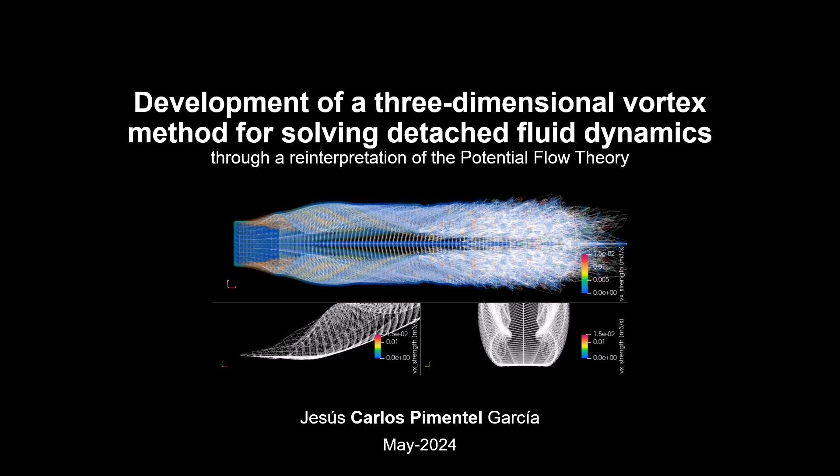Hello, everyone. This is Carlos Pimentel from Mexico, and I'm going to present the research I developed during my PhD in Spain related to computational aerodynamics. The title of this presentation is Development of a Three-Dimensional Vortex Method for Solving Detached Fluid Dynamics. As you can see, this research is based on a reinterpretation of the potential flow theory.

First of all, I would like to briefly introduce myself in order to put my work into perspective. As I said before, I am currently a PhD student in an aeronautical engineering program at the Polytechnic University of Catalonia. I have experience in experimental aerodynamics, having carried out tests on small parachutes and satellite TV dishes at the National Polytechnic Institute in Mexico. I also have experience as a user of CFD software based on the finite volume and lattice Boltzmann methods, mainly to perform aerodynamic simulation on parachutes, UAVs, full-scale aircraft, and rockets.

During my master thesis, we developed a Lagrangian mathematical model for a payload parachute articulated system to perform a dynamic and stability analysis during its descent phase. Furthermore, I have experience in the design, manufacturing, implementation, and testing of a small parachute for various applications, including UAV and sounding rocket recovery.

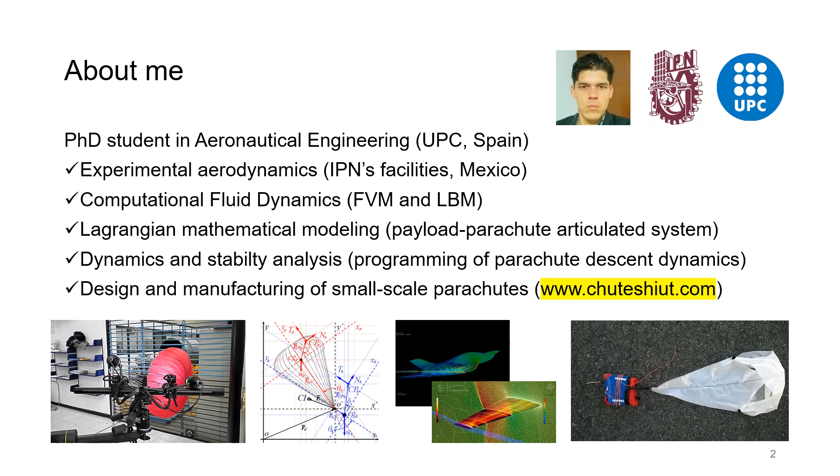It is now time to define the general objective of this research, which is to develop a pure Lagrangian velocity-vorticity-based computational code for the accurate solution of fluid flow past three-dimensional shell bodies, or in simpler terms, plates. Such a method must be developed from a strictly numerical point of view, avoiding the use of any semi-empirical approximations or ad hoc corrections. Furthermore, the input parameters must be reduced to a minimum in order to limit their dependence on the results and to reduce the complexity of the numerical analysis.

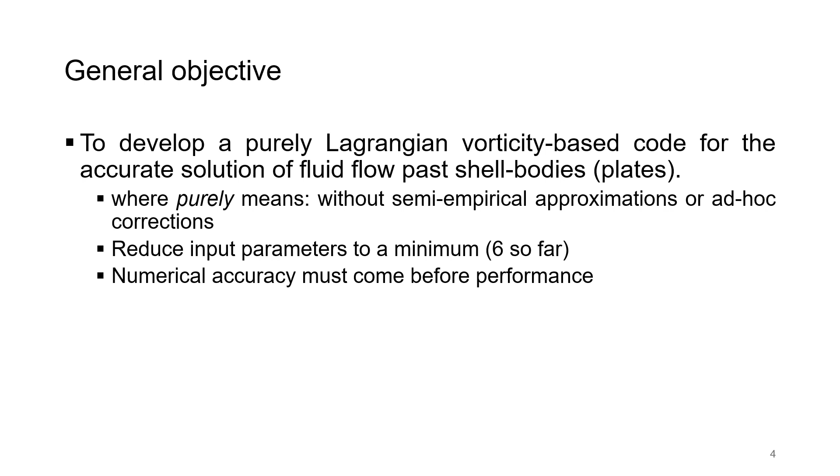At this point, the current version of the final code requires only 6 input parameters. It is important to emphasize that at this stage of development, numerical accuracy must take precedence over computational performance. I will now describe the specific objectives of this research. The first is to develop simpler codes in order to understand and analyze in detail their numerical behavior as a function of input parameters and spatial and temporal discretization.

The first corresponds to the two-dimensional unsteady discrete vortex method, or UDVM, described in the well-known book Low-Speed Aerodynamics, written by Professor Joseph Katz and Alan Plotkin in 2001. While the second corresponds to the two-dimensional full vortex cloud method, or FVCM, described in detail by Professor R.I. Lewis in the book Vortex Element Methods for Fluid Dynamic Analysis of Engineering Systems, published in 1991. The code for the latter is available for downloading on github.com, as well as the following methods described.

The second specific objective is to develop a more complex vortex lattice scheme from a simple one. The simpler scheme is the standard vortex lattice method, which only includes wake detachment along the trailing edge. A more complex model is shown in the corresponding figure, which includes detached lateral wakes and is able to give a good approximation, at least for the lift component, for low aspect ratio configurations in the low angle of attack range.

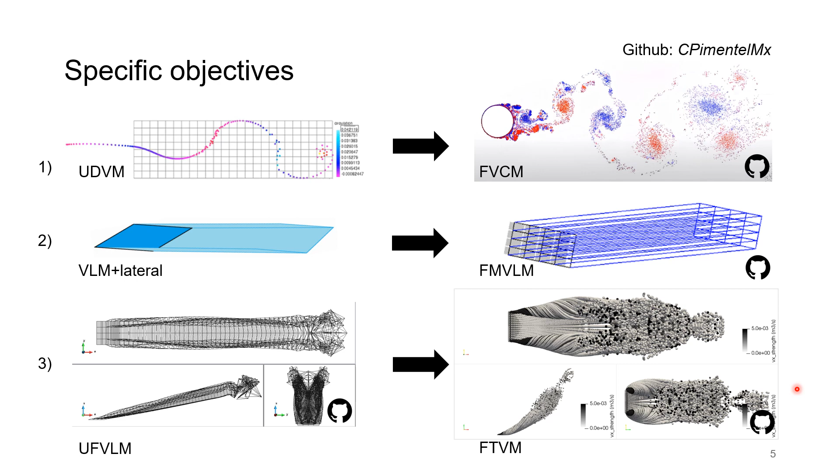Now it is time to briefly introduce the subject of this presentation. Potential flow theory is defined by the Laplace equation, which is a second-order linear partial differential equation containing the Laplacian operator and a scalar potential function. The vectorial velocity field u, which depends on the x, y, and z directions in Cartesian coordinates, can be obtained from the gradient of the potential function phi.

A classical visualization obtained by solving the Laplace equation can be observed in the upper figure, where the flow path is perfectly defined, rounding the airfoil along the calculated streamlines. Mathematically, a potential flow is defined as irrotational or vorticity-free by applying the rotational operator to the velocity and setting it equal to zero.

Moreover, a potential flow can be incompressible or compressible, so it is not limited to having a divergence-free field. But in the context of classical potential flow theory, we consider the first assumption. This is the subject of the present research.

The supposed inviscid assumption of a potential flow is in no way mathematically defined. The absence of fluid viscosity nu in the formal definition does not in itself mean that such a flow is inviscid, and strictly speaking, it is not possible at this point to define anything related to this particular property. Note that the definition of a potential flow defines fields, but not a physical property such as viscosity.

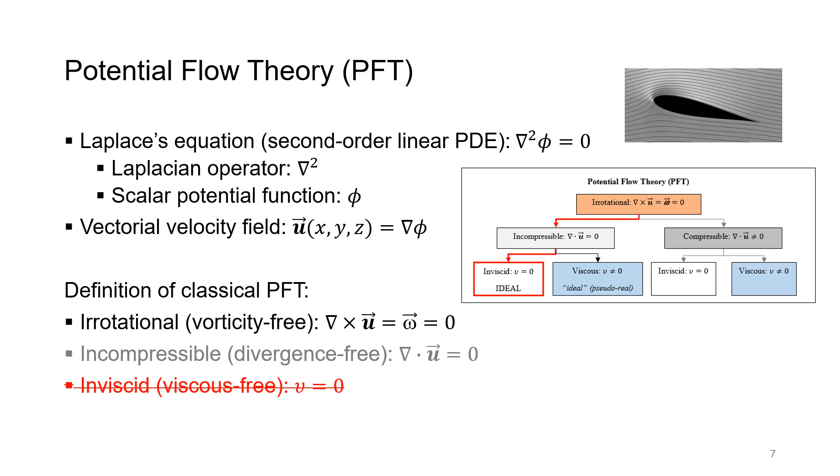To demonstrate that the current interpretation of a potential flow models a viscous fluid, I will refer to the well-known D'Alembert paradox, a classical problem where the drag component is absent for a two-dimensional circular cylinder immersed in an ideal flow, defined as an irrotational, incompressible, and inviscid fluid. The first thing to remember is that the Reynolds number is simply the quotient of the inertial and viscous forces.

The first figure shows a physical test for water, a naturally viscous fluid passing a circular cylinder at extremely low speed, corresponding to an extremely low Reynolds number. As expected, the water shows a laminar flow pattern on the surface of the cylinder. The other figure shows a potential flow simulation, which surprisingly produced the same streamline pattern, although it is known, or perhaps not, that potential flow theory models under an infinite Reynolds number condition, as confirmed by several renowned fluid dynamicists.

Unfortunately, I cannot go into more detail here, as time is limited for this presentation, but I invite you to read a short blog article entitled A 4-Question Quiz on Fundamentals of Fluid Dynamics to analyze this subject more deeply from an observational point of view.

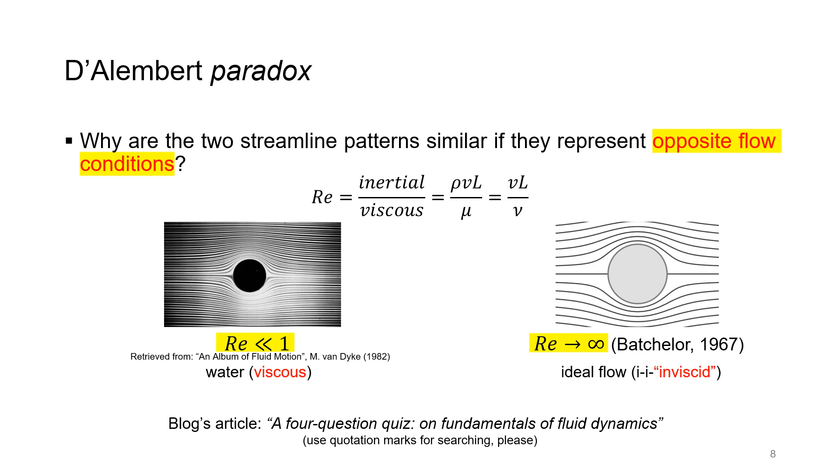Vortex methods are a family of Lagrangian-based numerical methods developed to approximate the Navier-Stokes equations in their velocity-vorticity form. As you can see, the pressure field drops out after applying the rotational to the total time derivative of the velocity field, which is a huge advantage in not having to deal with such a term. Since it does not appear in the definition, the flow solution does not depend on pressure. However, it can be reconstructed a posteriori if necessary.

In such an equation, the first term on the right-hand side corresponds to vortex stretching, while the second corresponds to viscous diffusion. By their nature, vortex methods do not require subdividing the space occupied by the flow, as do meshing methods in a more conventional computational fluid dynamics approach, such as those based on finite volumes. For this reason, it is less computationally expensive because, like all particle-based methods, it only needs to calculate the flow variables at certain and sufficient points of interest, rather than in the entire surrounding space.

But what is the relationship between potential flow and vortex methods? Well, vortex methods need to be fed with a precise amount of vorticity detached from the entire surface of the object in order to solve accurately. This is where the current development is relevant. It provides the correct amount and orientation of vorticity to the surroundings without forcing an attached viscous flow assumption, which should be the base model to solve fluid dynamics from a purely meshless approach.

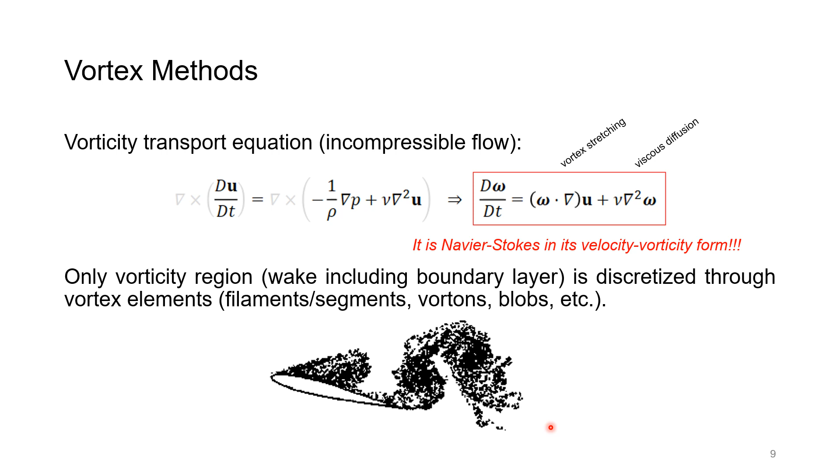The first article has been published in a first quartile journal called Advances in Aerodynamics. The full multi-wake VLM is the result of a numerically well-founded procedure that basically consists of adding groups of wakes to the simplest model, the single trailing edge wake or standard VLM, shown in figure 17 with number 1. Another well-known model is shown with number 2, which allows the separation of the lateral or wingtip wakes and gives good agreement for low aspect ratio configurations, but is limited to the low angle of attack range.

The next step, shown in number 3, is the addition of the leading edge vortex, which is numerically justified by a counterintuitive rotation, since it is analyzed within the pre-stall condition, where the leading edge vortex wake remains attached to the plate, as has been experimentally observed. For the post-stall condition, a logical and intuitive rotation must be expected. However, such a model will solve a cavity case, as concluded in the present research.

Number 4 shows a multi-trailing edge wake submodel, which is very similar to the detached circulation scheme in the LinAir code developed at NASA in the 90s, shown in the figure just below. In number 5, the leading edge vortex wake has been added to improve the previous results.

The next model, shown in number 6, is actually the full multi-wake VLM, in which external and internal vortex wakes have been included in order to capture the three-dimensional effect of the flow, which was limited in the previous models. As you can see, this is the chosen base model for future implementations within the present research. A detailed scheme of such a model is shown in figure 12.

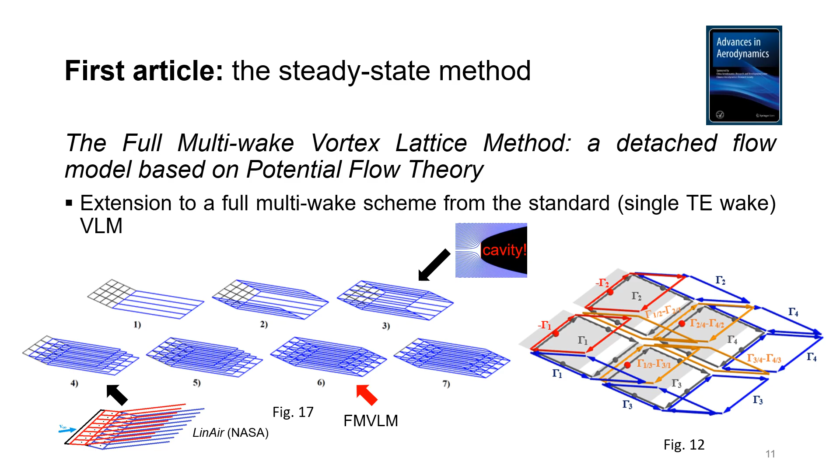It is now time to show the validation case for a quadrangular flat plate. In figure 22, it can be seen that the full multi-wake VLM is in perfect agreement with most of the experimental reference data for the lift coefficient in the medium to high angle of attack range, where it is assumed that viscous effects are negligible.

On the other hand, for the low angle of attack range, where viscous effects are assumed to be important, the full model without leading edge vortex or with a rounded leading edge agrees quite well with the experimental data, while the full multi-wake VLM, according to a precise verification, tends to agree with the linear analytical result as the discretization increases, represented by the black dashed line, which is by definition an inviscid result. Note that the difference between the analytical and experimental result is due to the contribution of the fluid viscosity.

Figure 25 compares the drag coefficient calculations for the low angle of attack range. As can be seen, the full multi-wake VLM agrees perfectly over the entire analyzed range. It should be noted that such an analytical solution is based on a linear lift coefficient calculation, and therefore cannot be extended to higher angles of attack under a low perturbation assumption. Experimental data are shown only for indirect comparison, as they include the viscous contribution.

The corresponding publication also shows the result obtained for the pitching moment coefficient, which is also in agreement with the expected results. Figure 19 shows a bounded circulation distribution on the plate at an angle of attack of 20 degrees. It is clear that the circulation, and hence the vorticity, is concentrated towards the leading edge of the plate, as determined experimentally, with a well-defined leading edge vortex.

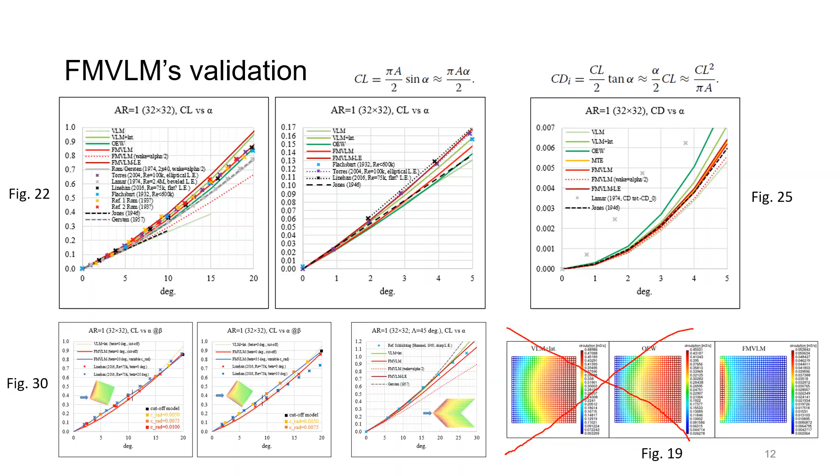The second article in the series was accepted for publication in the journal Computer Modeling in Engineering and Sciences after a particularly difficult review process, because it is the most difficult to explain and understand, especially because it requires more effort to analyze it from a complex algorithmic perspective. However, its publication is crucial as it is the basic model for future unsteady implementations.

Figure 6 shows a symmetric full multi-wake roll-up behind a 4x4 discretized flat plate at a given angle of attack, obtained by the unsteady full multi-wake VLM following a strict methodology to achieve the highest possible numerical accuracy. Two versions of such a method have been developed, the original and the improved. The former was useful during the verification phase, while the latter was useful during the validation.

The difference between them lies in the treatment of the first wake row. In the original version, such a row is fixed and aligned to the free stream velocity, while in the improved one it can adapt itself according to the instantaneous flow solution, becoming a more accurate scheme. Both are schematized after the first iteration in Figure 4, where the red filaments correspond to the original, while the blue ones correspond to the improved version.

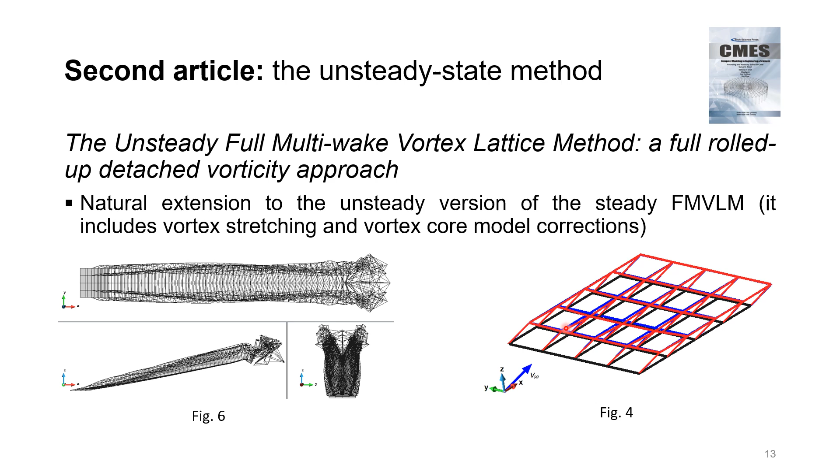Since the particular publication is the densest in terms of numerical analysis, detailed explanation of the verification and validation phases will be avoided in this presentation. Figure 5 compares unsteady lift and drag coefficients for different angles of attack. The main characteristic of such numerical results is that they converge to a steady-state value quickly.

In Figure 8, the same aerodynamic coefficients are compared by including vortex stretching and vortex core radius corrections. There are some notable numerical differences. Figure 11 shows the comparison between the original and improved version of the UFVLM for a single angle of attack. Some differences are also evident.

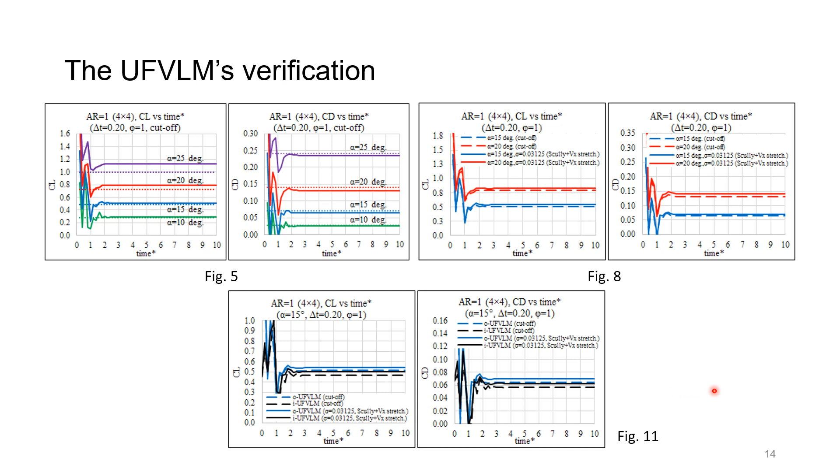Now, it is time to talk about the validation phase. Figure 14 shows both steady and unsteady numerical results that agree within an angle of attack range, as is the case for the single-wake steady VLM and its unsteady version, the UVLM. This means that the unsteady versions practically replicate the aerodynamic coefficient behavior of the steady version.

As you can see, this particular method is not able to capture the aerodynamic characteristics along the entire post-stall range. Note that slight differences between the results obtained by the original and improved versions are due to the orientation of the first wake row, as shown in Figure 15.

Figures 16 and 17 show a strange wake pattern where the first wake row is artificially extended downstream to obtain the correct aerodynamic coefficients. This paper concludes that such a problem is related to the choice of filaments or tubes to discretize the vortex wake, especially for configurations where there are strong wingtip vortices.

By choosing spherical elements for the discretization, such a problem is avoided, since these types of element induce the velocity in a radial way, whereas the previous ones induce it around an axis, thus obtaining higher induced velocities in the surroundings. As you will see, the method presented next and its result explain such a fact.

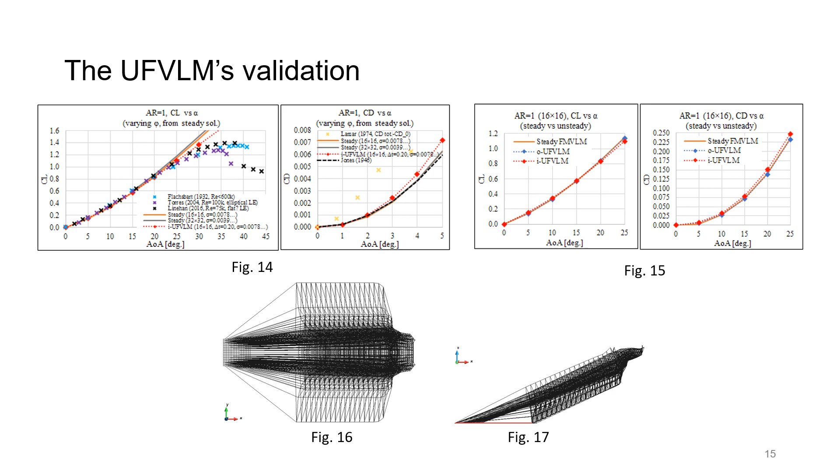The last article in the series describes a vortex element method that combines vortex tubes and vortons to discretize the vortex wake and bounded vorticity on the plate. It is fully based on the concept of the full multi-wake VLM and the unsteady full multi-wake VLM algorithm.

The main contribution of this numerical method is to obtain a perfectly stable method by allowing the numerical conservation of both circulation and vorticity through a novel vortex stretching scheme based on the temporal variation of vortex volumes with time. Such a scheme is a well-justified calculation described in the corresponding publication. However, it requires special effort and time to explain it in detail. For this reason, only a brief description is given here.

As a wake vortex tube evolves over time, it can expand or contract under the action of the total velocity field, but according to the conservation laws, its volume must not change from one instant to the next. Thus, the vortex squeezing stretching term is solved by such a cylinder strain, while its induced velocity field is obtained by its corresponding spherical element or vorton. The same process occurs with the remaining wake vortex elements at each time step along the entire simulation.

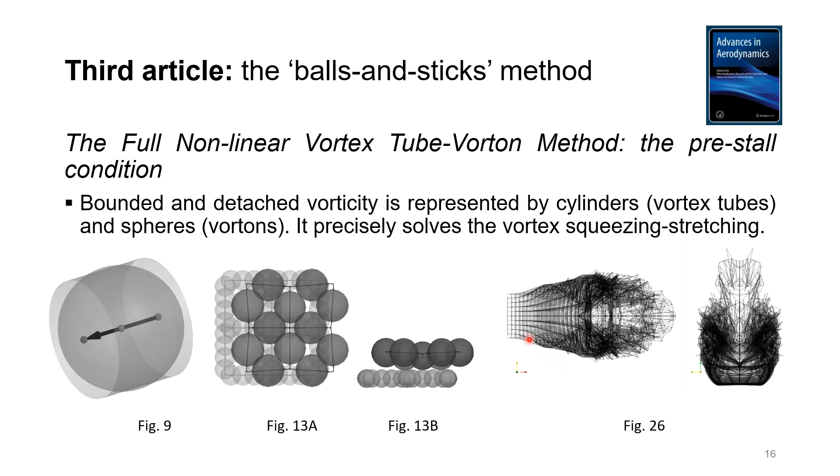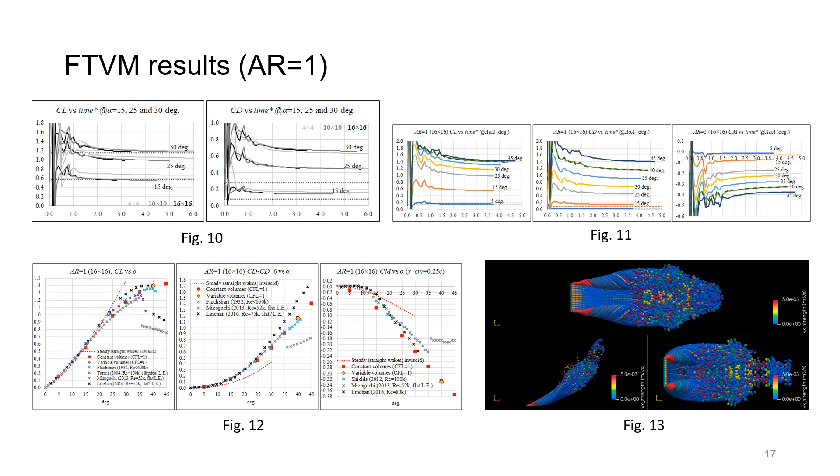This section presents the main conclusions of this research, but the full set can be found in the corresponding thesis document. Current numerical methods based on potential flow theory, commonly known as panel methods, inherently model a bounded and thus viscous fluid condition due to their circulation vorticity attached to the surface scheme, including an infinitely thin boundary layer. Thus, a detached flow condition cannot be modeled or solved under such an attached circulation vorticity approach. In separated fluids, attached boundary layers do not exist.

The steady full multi-wake vortex lattice method, or FMVLM, is the basic model for circulation vorticity numerical methods for the accurate solution of inviscid detached flow past bodies. Its premise is extremely simple. Several small plates share their wakes in proximity and give the aerodynamic characteristics of the whole plate, including the inviscid drag component. Any simplified detached circulation vorticity scheme does not correctly model a continuous media phenomenon such as incompressible aerodynamics. By detaching the vorticity only from the external edges of a plate and general geometries, it solves for a cavity case, including a vacuum behind it, resulting in incorrect pressure distribution and external force coefficient calculations.

In the pre-stall condition, the leading edge vortex in a shell body has a counterintuitive rotation. This allows us to explain why the leading edge contributes to the generation of forces, including lift. On the other hand, within the post-stall condition, an intuitive leading edge vortex rotation is present, and such a sign change helps to explain the abrupt loss in lift after the stall point, since such an edge no longer contributes to the external force calculation.

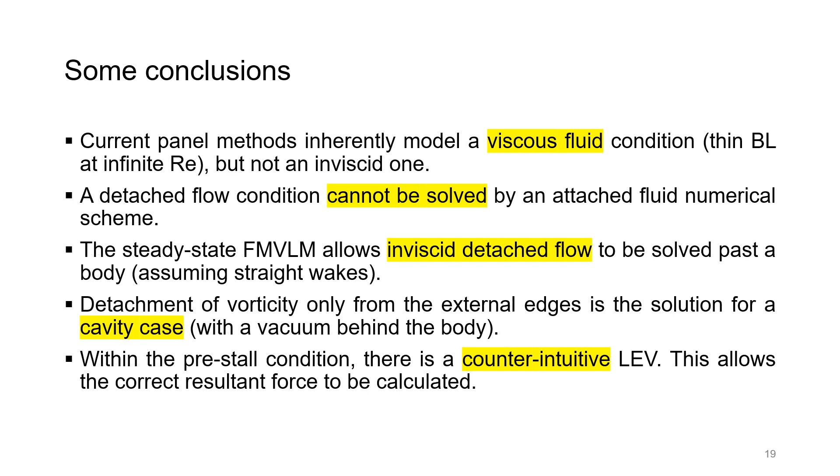The full nonlinear vortex tube method, or FTVM, is a fundamental unsteady scheme for solving the Euler and Navier-Stokes equations in their velocity-vorticity formulation through pure Lagrangian mechanics and conservation laws. Its extension to general geometries and more complex phenomena, such as compressibility and thermal effects, should provide an efficient alternative for meshless computational fluid dynamics.

Since the pressure field is decoupled from the flow solution of the Navier-Stokes equation in its velocity-vorticity form, the induced velocity field is the main cause of fluid attachment or detachment, not the favorable or adverse pressure gradients. The pressure field is a consequence of the velocity field, not the other way around. This is clear in the dynamic pressure equation, where the dependent term is pressure and the independent term is velocity.

The resultant force vector acting on a body immersed in an inviscid fluid is a consequence of the induced velocity field developed by the evolution of the vorticity field, detached from the entire surface, then advected and diffused in the viscous case. This holistic approach answers a fundamental aspect of fluid dynamics: how are lift and drag generated, or why do airplanes fly?

The mathematics behind potential flow theory is clear. The supposed inviscid flow property does not appear explicitly. Irrotationality does not imply inviscidity per se, since according to the theory of vorticity generation mechanism, a rotational field is generated near a surface in a non-viscous medium.